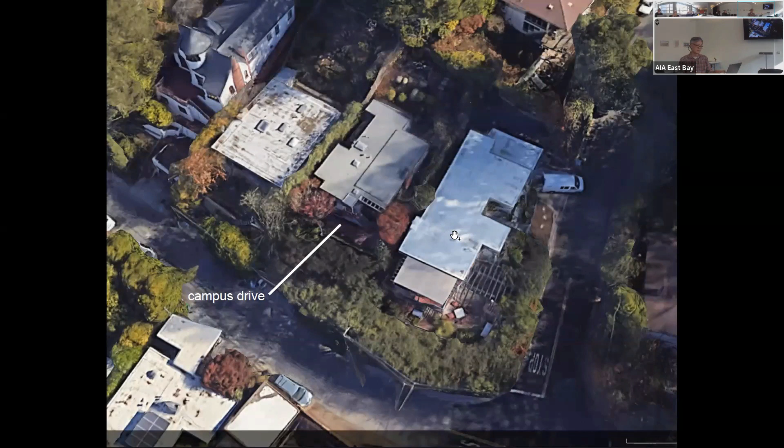When people contact me on my website, I usually suggest we have a phone call first as opposed to going out to their house, because a lot of times I want to avoid the situation where I drive somewhere and discover it's not something I'm interested in.

So these are my notes from these folks. They're a couple, kind of middle-aged. The wife is a scientist at Cal, the husband is a professional bassoonist, and they have an adopted grade school age daughter. They actually recently relocated to the Bay Area, coming from New York City, which I thought was interesting. I like New York City, so that piqued my interest.

By the end of this phone call, I wasn't so sure I was interested in the project. It seemed like sort of a glorified master bathroom project, and I was like, well, maybe not. But they talked about an addition, and I was having a hard time visualizing what they were talking about. So it was interesting enough for me to go out there and take a look.

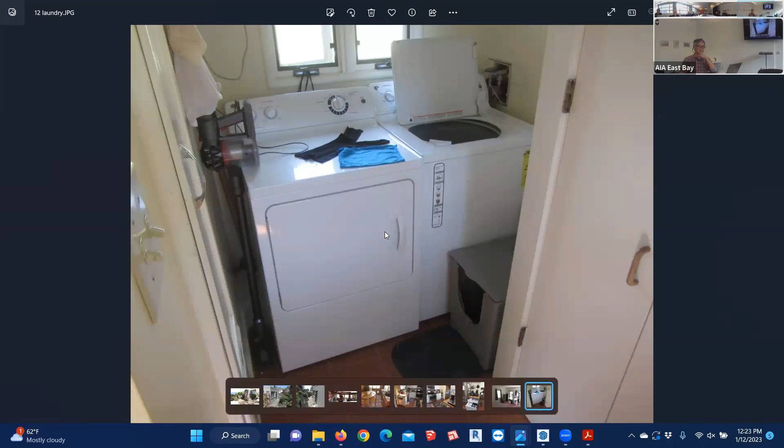Behind this door is a little addition that's literally about six feet by six feet, and it's their master closet - a walk-in closet. And a tiny little - well, it's not tiny, but it's a very awkwardly laid out laundry room. Then this is the pantry closet, right off the kitchen.

So those are my photographs of the house.

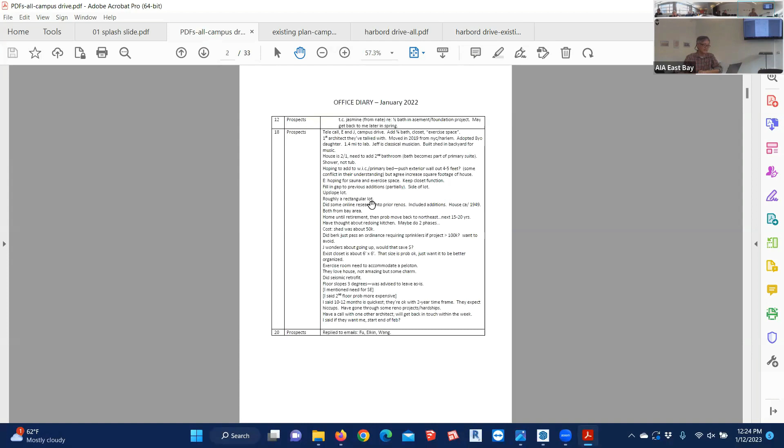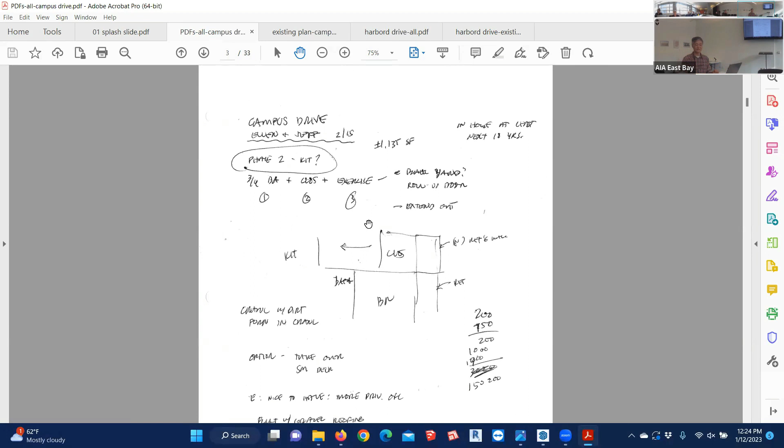These are my notes, actually - I forgot to mention, these are my notes from my site visit with them. On my first site visit, I walk around with a clipboard and talk further, and I try to jot down the things that they're telling me. A lot of times I can't decipher them later, or I forget what they mean, but I give it a try.

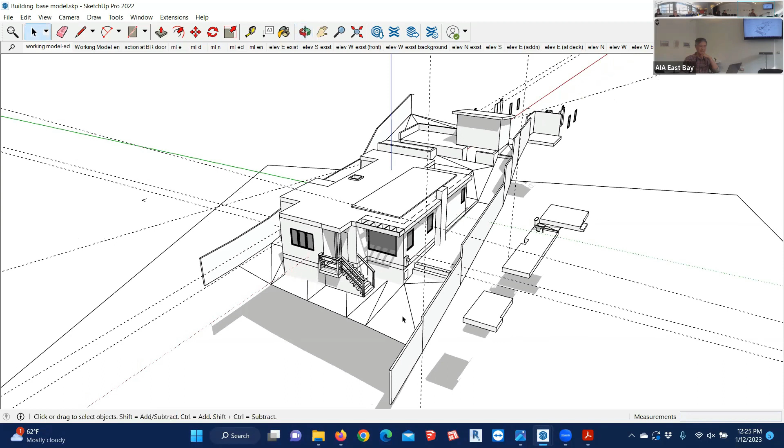I'm not so great at manipulating topography and volumes that represent the earth, so you can see this kind of reads as a bunch of faceted planes here, but if I make do, you can see that you can turn shadows on and off. Here's the husband's music studio - there's a deck that they built next to it. It's quite nice, there's a kind of raised planter bed here. And the stairs, which aren't shown in the model, are here up to that higher level.

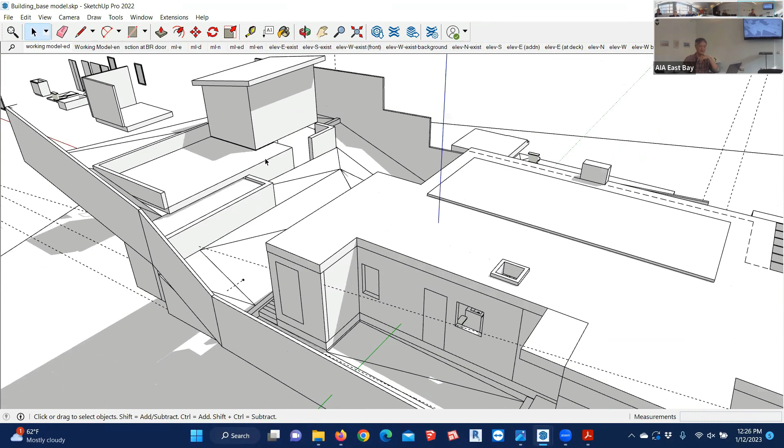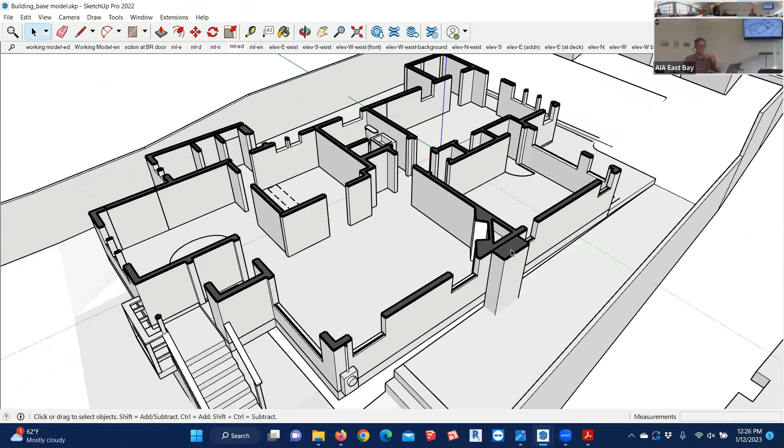So that's the model, and you can set up different views to show different things. Here's the existing floor plan - it's basically just the model cut at floor plan height, and you can tell the program to poché all the walls. Okay, so that's kind of where the starting point was, and now we just launch into the design.

Both. Let's see if I can.

Before I start showing design sketches - both projects, the clients are relatively good about thinking about what they want and responding to questions, which I often find not to be the case. So this is just a snapshot of an email thread I had mainly with the wife, and she included some images of things that she likes. We started thinking about the kitchen, and you can see she has some interesting tastes - it's kind of mid-century modern.

I don't dive into this level of design right away because I still want to figure out what the plan is going to be. But it's nice to have this in the back of my head as I start thinking about design.

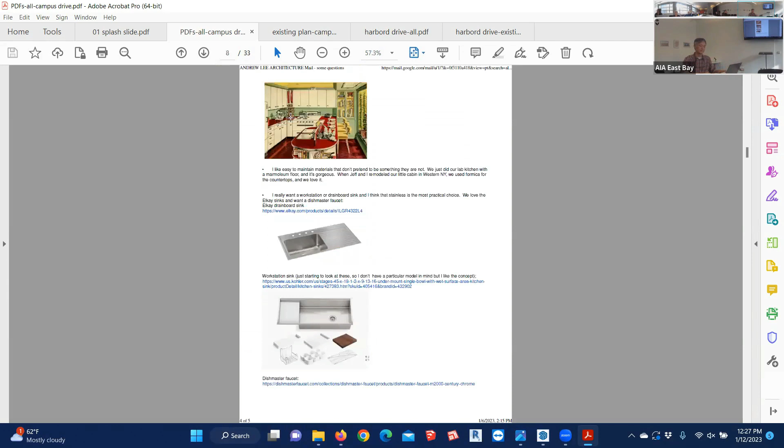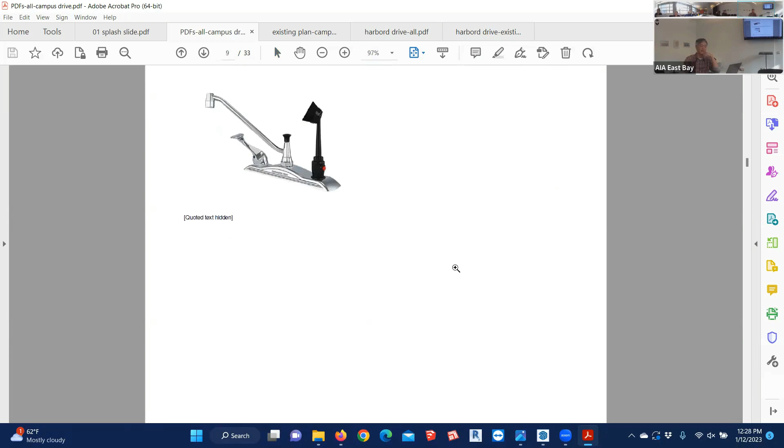Some beautiful images here, which, obviously I probably won't have the opportunity to do things like this, but it gives you a flavor of what they like. She even got to the point of picking out some plumbing fixtures that she likes, which is really nice. I really appreciate when clients do that. I'm not so sure I like that faucet, but in that case...

So both projects, this project and if I get to it, the other project, really lent themselves to attacking different parts of the program as little separate areas, and then they could be kind of mix and match. So what I'll show you first is the back of house interventions.

This first sketch is essentially what I think they had in mind when they came to me. And when clients do have an idea in mind, I usually say, okay, let me see if that works. So you can see this is their master bedroom. This is their little exercise room with the Peloton dashed in with a light line. This would require cutting into the slope, so I showed a little retaining wall and a path around it if they wanted to maintain a connection between the backyard and the side yard.

It takes advantage of an opening in the wall that's already here for a window and just turns it into a person door with a walk-in closet. And then what I think is a fairly typical bathroom layout, but I think it works well. The downside is that it isolates the existing bathroom, so we'd have to fill in this window, but so be it.

So that was the first scheme. I always show at least 2 or 3 schemes initially, because 9 times out of 10, there's at least a couple solutions to what people are asking for. So usually there's at least 3 different schemes, or 2 schemes and a variation.

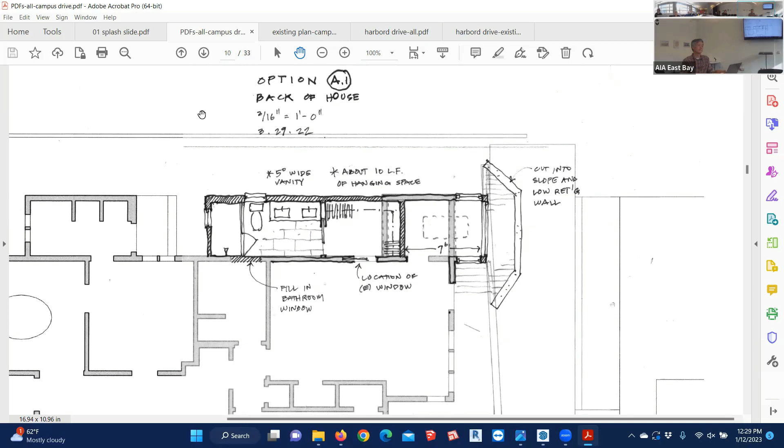So the variation on this is this diagram, which basically moves the opening into the addition over to here. And it attacks that problem I mentioned before, which is I think it's kind of a bummer to have the bed against this wall because it's right when you walk in the door. I feel like this is a better layout. You just punch an opening in this wall, you have a little vestibule here and a walk-in closet on this side.

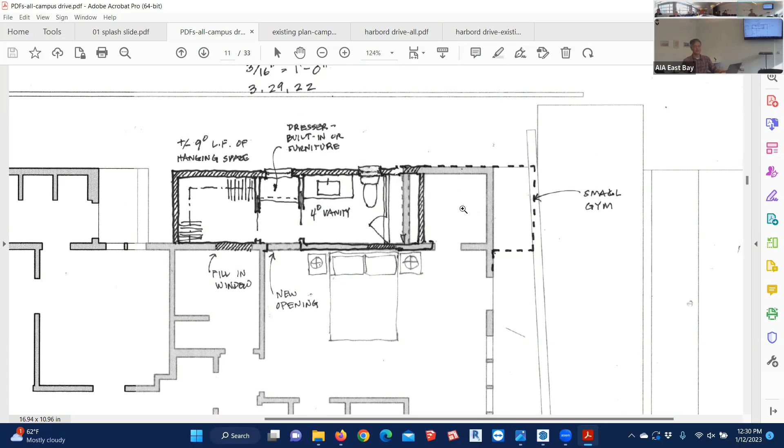Master bath on this side, same plan for the gym. Somewhere in the process, they emailed or called me and said, Andrew, we think we want the gym to be bigger. I said, okay, let's do that. So I drew this sketch, which basically shows the addition going farther into the hill.

I gave up on the idea of maintaining a path around it because by the time you get to this point, you're 6 or 7 feet above the level of the floor here, and I just felt like that's going to be an exorbitant concrete retaining wall.

I also had an idea of providing some kind of separation here if her office function remains in this little zone. So I thought, you could create a little pocket with some sliding doors that could be translucent to let light through, but it gives a little visual break between their sleeping area and her office.

I always try to do at least one scheme that is, I guess you could say, thinking out of the box, or just getting away from the assumption of what the solution is. So it occurred to me at some point that it would be relatively easy to repurpose this bathroom and make it basically the ensuite bathroom just by changing the entry sequence.

So this sketch shows the hallway moving to here and the entry into the master suite happening here, and then you're capturing the bathroom. Basically wouldn't have to do anything to the bathroom if you didn't want to, and then creating a standard 5-foot wide bathroom here for their daughter and for guests.

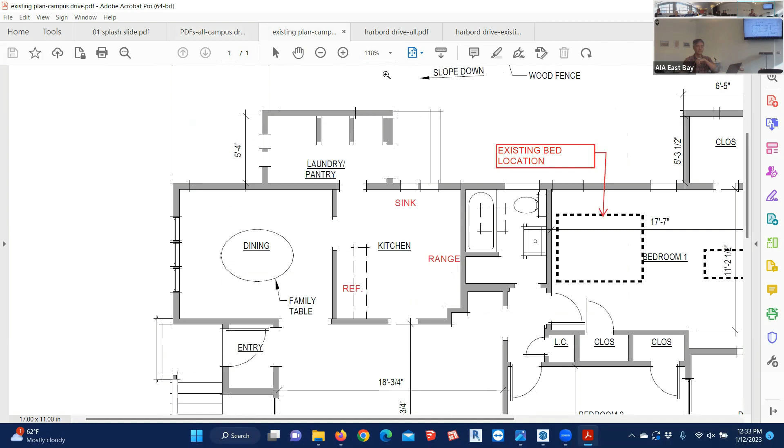A lot of times the first scheme I show will be the cheapest option. What can they do for the smallest amount of cost? In this case, I wanted to work with this footprint, and I thought I'd close off one of these openings to give them a more functional plan. So that closes off the opening to the living room, but it maintains maybe a little pass-through window, so you have a visual connection. Otherwise, it gives you a U-shaped plan, a functional U-shaped plan.

You can open up this wall opening from here to here, and it becomes an open, casual relationship between the kitchen and the dining room. But otherwise, the work triangle is essentially the same. You have sink, range, refrigerator. Same thing here, sink, range, refrigerator. And then I show some ideas for the pantry in the next sketches.

I rapidly thought, well, if we're going to be doing an addition here, why not just continue the addition into the kitchen? In my experience, if you add just a couple feet to a kitchen, it makes a big difference in terms of the feel of the room. Even a couple extra feet of countertop makes a big difference. So I bumped out this little hatched area.

Again, it keeps the same work triangle. I gave them back the opening into the living room, but it just gives them a little bit more space. This could be open from here to here for a nicer visual connection.

And then because it's such a casual house, I thought it wasn't a big deal to cut an opening in the dining room wall here and have this volume be two separate little rooms, one for the washer dryer and one for a little pantry area for the kitchen. And you still have the door out to the side yard.

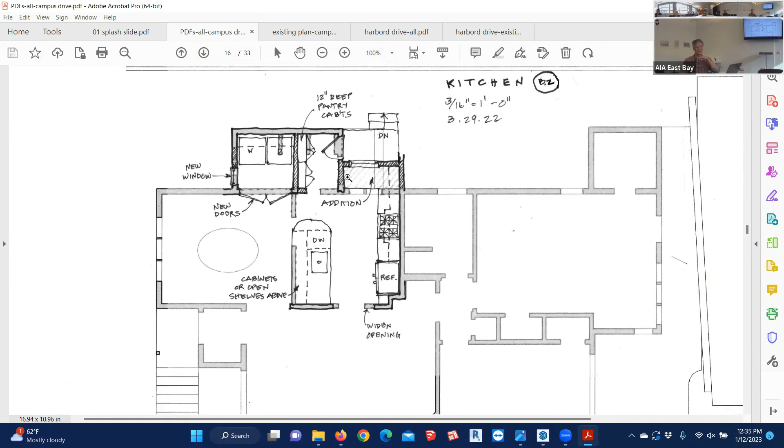This is another variation, and the big change here is that I just changed the work triangle. I moved the sink to the peninsula, and the range and the refrigerator are here. This can just become an extra counter space with a view out—maybe a place for morning coffee or something like that.

Somewhat of a different configuration for the laundry rooms, but same idea.

And then I did one out-of-the-box idea, which is flipping the kitchen and the dining room. It's fairly easy to do. After I drew this, I realized I'm not sure really what this gets you. I think it's really just reversing the two spaces.

You do have an opportunity for maybe a little bit of a nice inside-outside feel here, with a pair of French doors from the dining room. But otherwise, I don't know if this really added that much. And I found a lot of times when you propose moving a kitchen, it's almost too much for people to process, and they would kind of reject it without even really being able to think about it.

I always like to include a little table like this whenever I do a kitchen, and this is a comparison of the functionality of the existing condition—base cabinets, counter space, upper cabinets—and the different schemes I'm presenting. So they can have a sense of what they're gaining functionally from these different schemes. Am I getting a lot more counter space? Am I getting a lot more wall cabinets, et cetera?

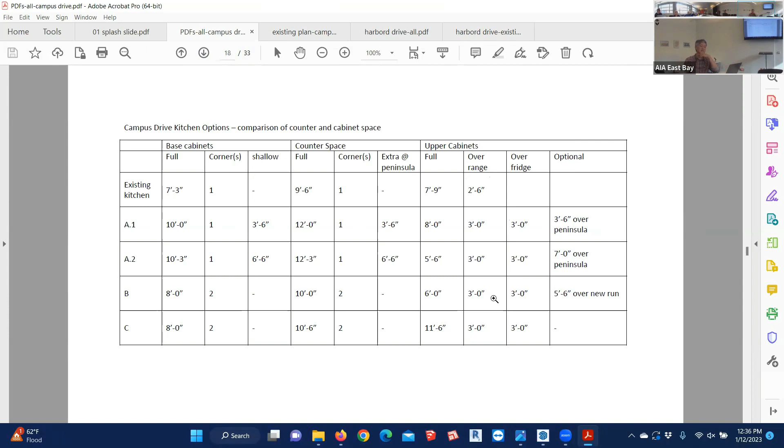And then I had a couple more out-of-the-box ideas for her office. I realized that you could actually do a little addition here. There's not a whole lot to be lost by blocking this wall—this is where the washer dryer is currently. There are little windows, but it's not important.

This gets her office away from her bedroom. She no longer has a backyard view, but now she has a view of the bay.

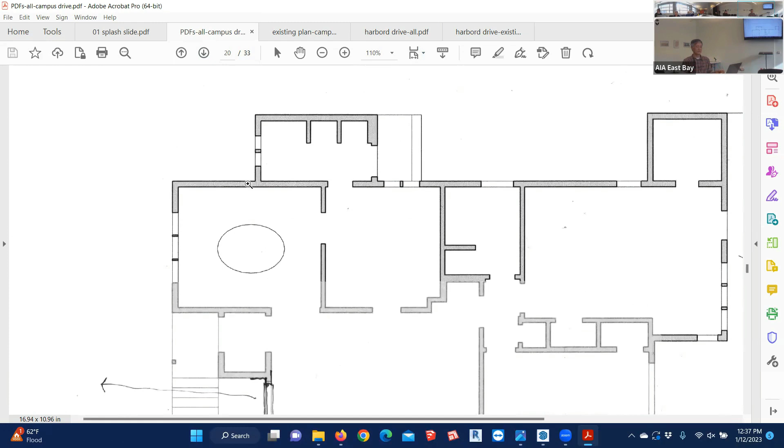This is facing west. She can put her standing height desk there. Technically, this is not a legal room, but in my experience, if the opening is wide enough between this space and the dining room, the plan checkers won't give me a hard time about it.

And then the other out of the box idea I had was doing a little addition off the living room. This preserves most of their view from the living room through this big picture window. This could be her office, or it's big enough to be an exercise room. It's actually a legal room, I think.

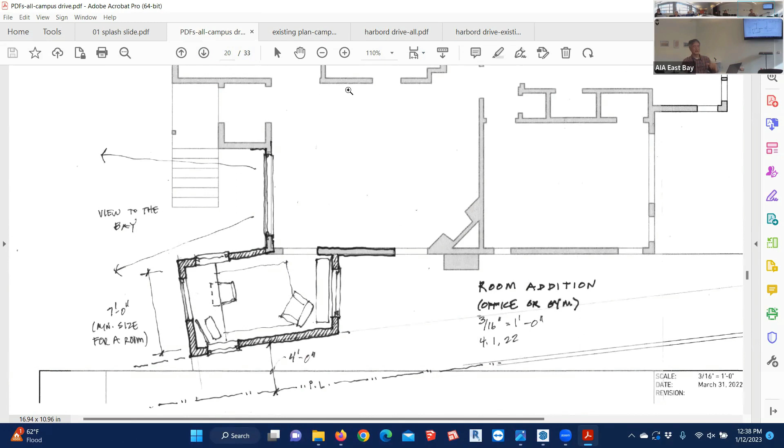So those are a couple ideas that I threw at them, and I think they appreciated seeing those ideas.

Okay, where are we? So those were essentially my first pass at schematic design.

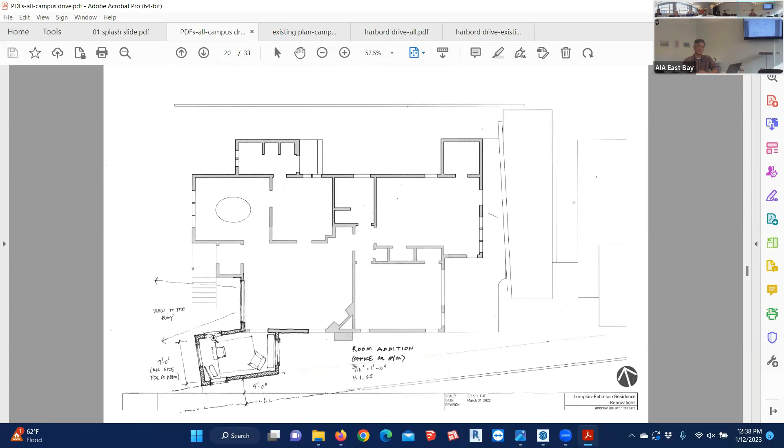We went through some conversation. I think they liked a lot of things that I showed them. They pretty much rejected the idea of the hall bath that took over part of their daughter's room. They didn't like this image here. Well, I don't think it's that they didn't like it, I think this is just too big of a change for them - this kind of little angled room here.

So let me keep going. This is, let's see... yeah, this is essentially the final scheme.

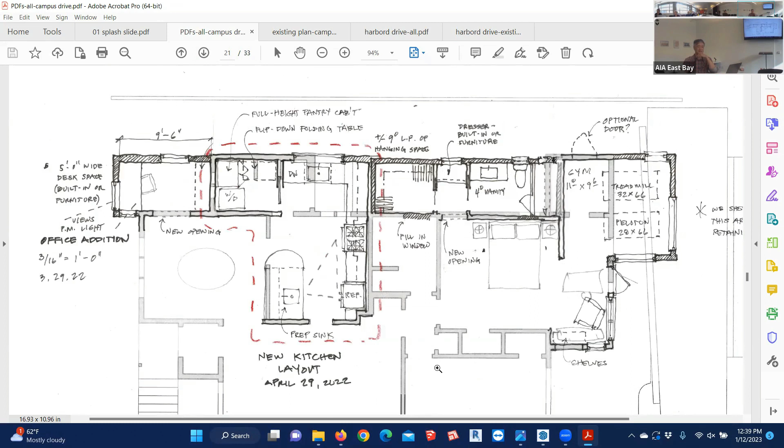They actually asked me if we could just bump out the kitchen all the way to align with the rest of the house. Maybe somebody who's listening or watching can tell me - I know in Oakland there's a rule that you can't have a continuous plane along the sidewall of the house. I just don't know if that's the case in Berkeley.

If it is, I think we can do a little inset here to give a little bit of planar relief, if you want to call it. That makes such a huge difference. Yeah, well, you gotta satisfy the planners.

They like the big gym. They like this idea of moving the opening in their master bedroom. This is the final scheme for the kitchen. She liked the office. The only thing that's a little bit up in the air is this - still kind of TBD. We've been doing some back and forth with this area here, the washer dryer and pantry.

Let me go back to the model really quick and show you the final design.

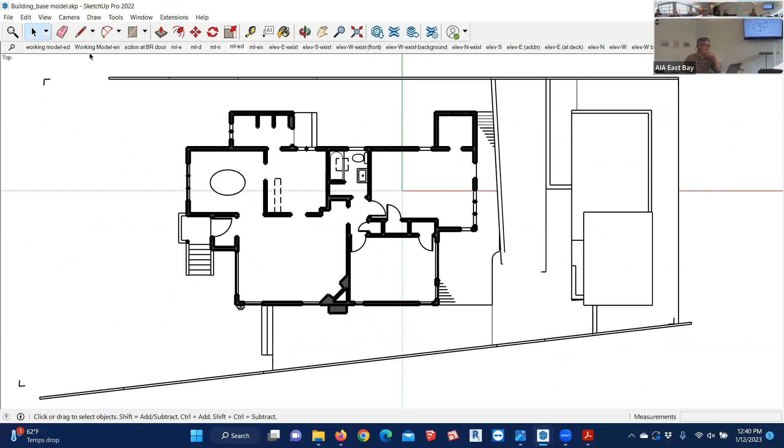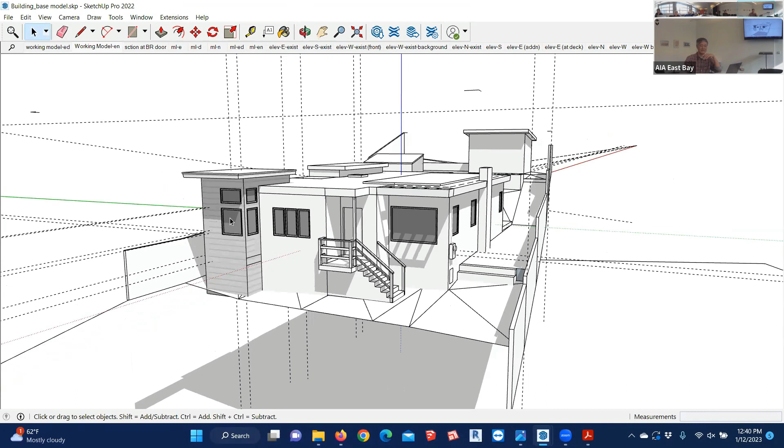One thing I wanted to say about this that I've been pleasantly surprised by is that there's something about the scale of the proposal that I feel really comfortable with. It's relatively small, the additions are relatively small, and I feel like it's appropriate to the house. Obviously it's not a traditional house, not a pitched roof house, not a bungalow, and I feel like the language of what I've tried to work out here fits with the house fairly well. I'm just looking forward to seeing if it feels nice when it's built.

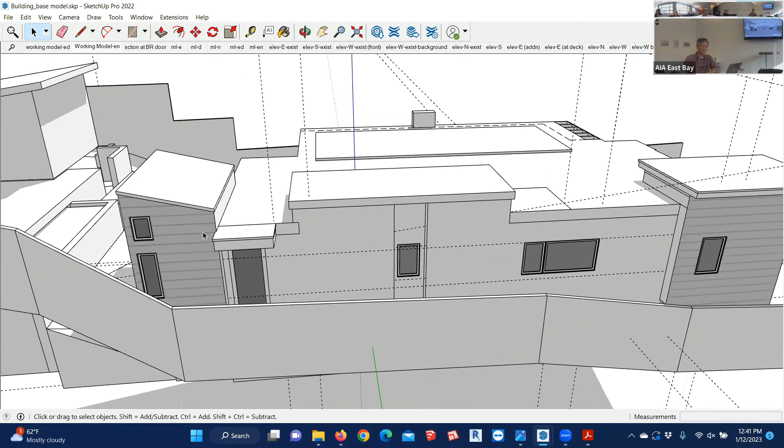So here's her little office addition. This whole space has been filled in here. And then this is the little gym addition. We're actually leaving the entire roof here, so part of the ceiling of the gym addition will be vaulted ceiling, but part of it will be a level ceiling at the existing ceiling level.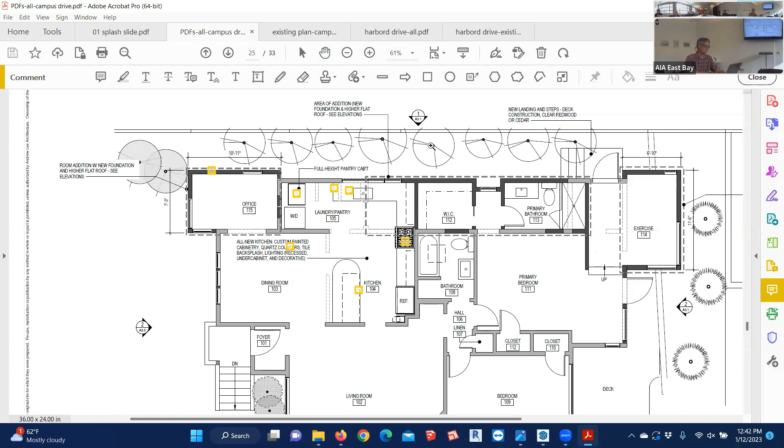And then elevations.

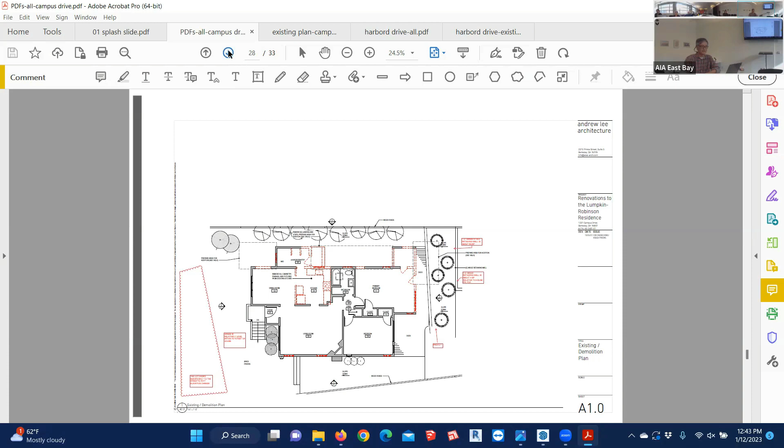And then I had another set. This is the set that I'm using for dialogue with the structural engineer. I sent him the set and I had some things that I wanted to point out to him, and he has just now developed his first pass of structural design for the project.

Ooh, and that's where that project is. Maybe I'll take a little pause because my mouth is dry.

Any questions so far? Just one on this, I guess it's the north pop up there in the addition. Yeah, you're gonna look to get any skylights in there?

Skylights, here or here in the back? In the elevated portion, the middle. Oh, in the middle portion. You know, I didn't think about that. That's not a bad idea though. I will now think about that.

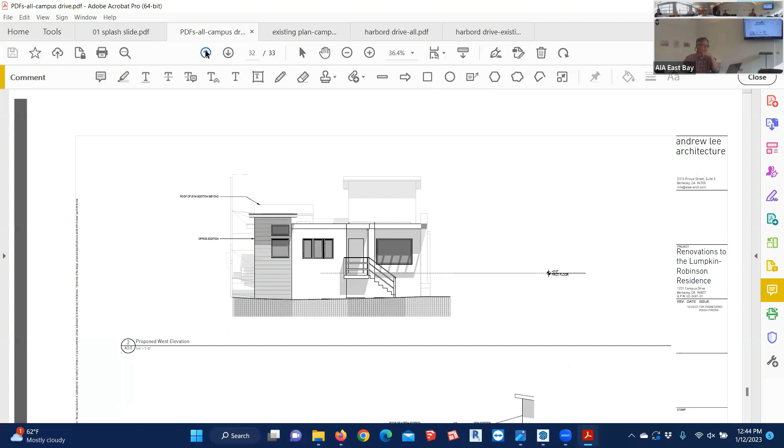This side is closet, so I don't know if it's worth it, but this side is bathroom. So that might be an interesting idea. I would have to look at that section and see, does the roof need to be a little higher? With that bathroom, one thing I find that adds a lot is natural light, and you lost the wall there. But you can put a big ventilating skylight in a place like that, and you can solve the ventilation problem and the lighting problem with one move. Yeah, it's a good idea.

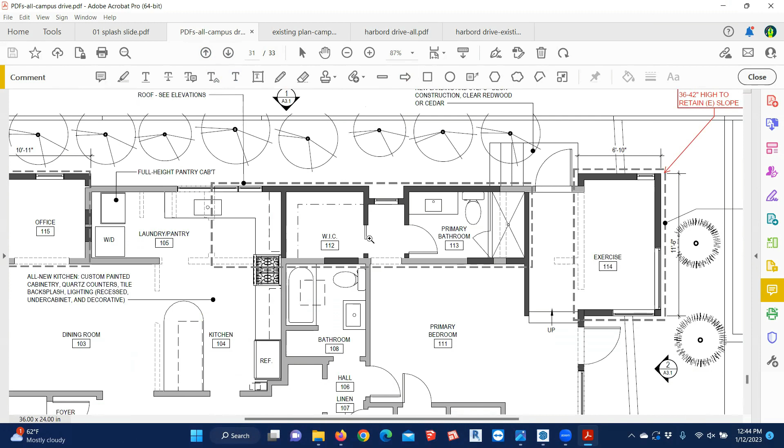Are there any questions on Zoom? Yeah, what happens with the existing bathroom? Is that getting a skylight or something? It already has a skylight, Kristen. Oh, okay, yeah, that's existing.

So I have a real nuts and bolts sort of question. How do you structure your fee proposals so that you can do all these different schemes and feel comfortable? That's a great question, Claudia. I pretty much know at this point in my practice how long it takes for me to come up with the initial round of schematic design, and I'll provide an estimate. All my contracts are hourly, but I provide an estimate where I can, and the first round of schematic design is usually anywhere between 15 and 20 hours.

And then I sit down with them, ideally in person, but more often by Zoom. Revisions are really just kind of running, I'll say something like, at the minimum usually it's like 5 hours, but it's as much as you want, essentially, and people seem to be okay with that. And then when you get to the construction documents, you set like an upset maximum or some sort of budget goal? I don't think I've ever set a not-to-exceed number. I usually tell people it's somewhat related to construction cost. It's all estimates.

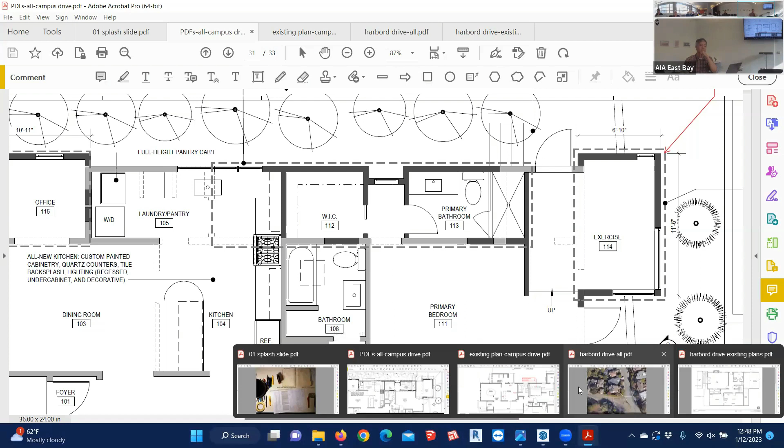Yeah, yeah, I do something weird though. I do all the structural drawings. And so, yeah, I need them to really be on board with me. I do that because I combine the architectural and structural information, so I don't get one guy out here doing one thing and me over here doing one thing, and the guy in the field saying, yeah, right.

How am I doing in time? We're doing fine, it's 10 to 1.

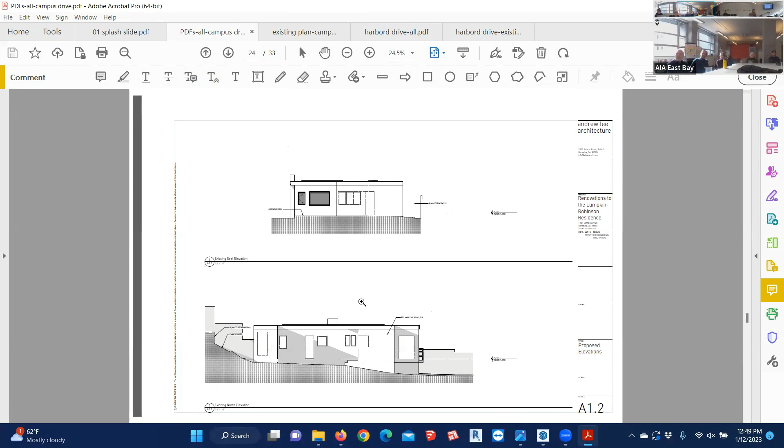I just have one question, Andrew, on how you present your work to your clients. On one scheme where you showed the addition off to the lower left, the views in the office were kind of different from all the others. It wasn't like an orthogonal addition. Is that something you typically present with some 3D or elevation drawings to help them understand that?

I do. I do it where I think three-dimensionally it's interesting or important for them to see a 3D model. Unfortunately I think I archived it, but I did show them some three-dimensional views of this scheme to help them visualize it. Actually I'll show some 3D views of the second project.

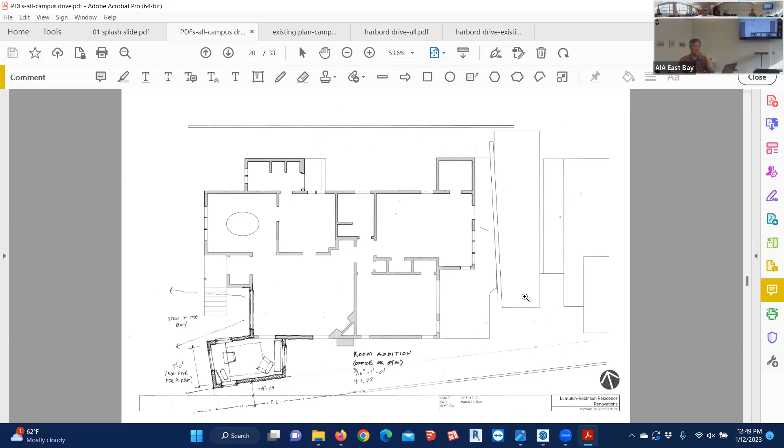Let's see if I can. Again, started with a conversation. These folks came to me through the website. Interestingly, we started with a Zoom call, not a phone call, so I was looking at these folks when we were talking for the first time, which was fine.

I added a couple notes here - this is sort of like the human element. They have 2 kids that are basically in the process of leaving home, and they said they're in the house for possibly another 5 or 10 years. My thought was, that's not a lot of time to want to undertake this big project, but they do.

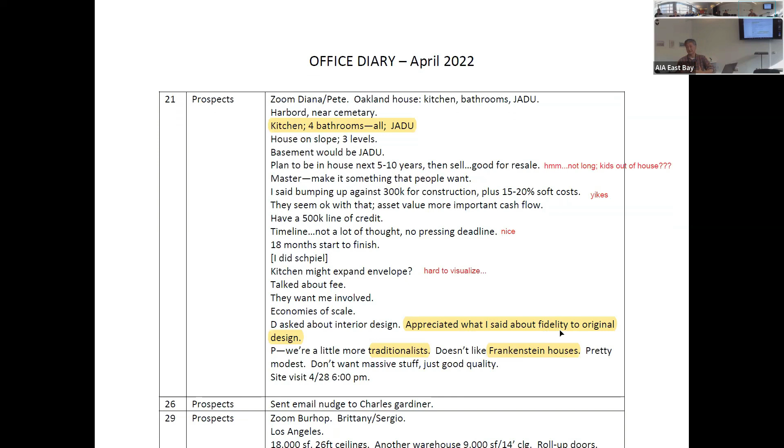The other thing I noted here is that I think I'm in trouble with this project because I may have set their expectations too low as far as the construction cost, which I still haven't figured out a way to avoid getting into trouble with sometimes. They appreciated some things I said in my kind of elevator speech about my approach as a designer, which was nice.

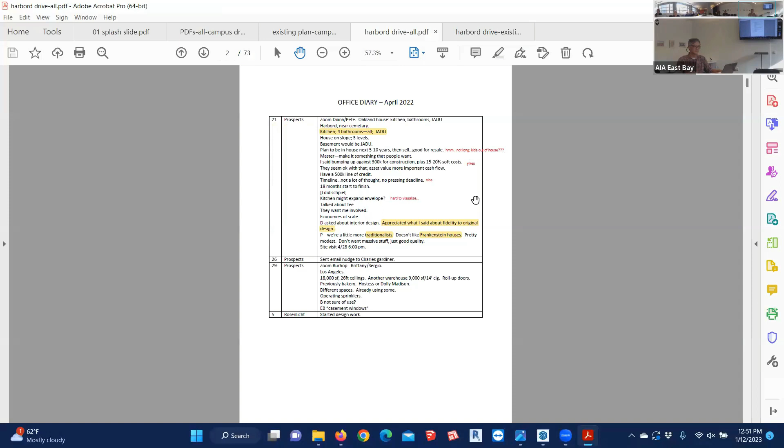But yeah, so let me go to the photographs. Let's see. So this started back in April, I believe. Before I start talking about more of the house, we had a meeting - a follow-up meeting in their dining room after the Zoom meeting, just to have a second conversation. I think I brought my laptop and showed them some more things.

And the wife in particular is one of those people who, there's something about her facial expression where you're talking with her and thinking she is not buying a single thing I'm saying. You kind of progressively get more nervous and feel more like a fraud. By the time I walked out of there, I was like, there's no way in hell I'm getting that project. Oh well, easy come, easy go.

Sure enough, like 2 days later, they emailed me and said, we liked your presentation, and we decided, why wait? We'd like to hire you. And I'm like, wow, okay. Since then, I've just realized she's one of these people who has this facial expression where she's kind of slow to jump on board with things, and she's thinking about what you're saying very, very critically. She's not like all excited and blah, blah, blah.

But she's actually a very nice person. It was just interesting, the kind of human element of what we do - it's like constantly, just when I feel like I've seen so many different houses, so many different families, then you have another experience and you're like, oh my God.

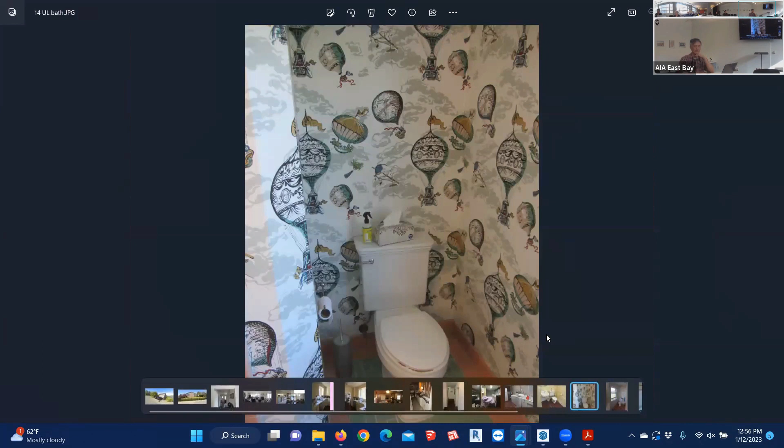Jumping upstairs to the second floor, this is the hall bathroom, the kids' bathroom, and then a couple shots of the master bath, which is kind of vintage, and then the master bedroom beyond through that doorway. This is an exterior shot.

Here's that retaining wall I mentioned. Here, surprisingly, this is a cantilevered volume, and this is part of the breakfast room that you saw—the kitchen is behind this wall. And this is the other back corner of the house, looking up towards the driveway and the street. This is the back corner of the house here.

I didn't talk about the program. The program for this project is quite large. It's renovating the kitchen, full renovation of the kitchen, and they talked about expanding it because it's quite small. And renovating every bathroom in the house—there's 4 bathrooms: one on the ground floor basement level, one on the main floor, and two upstairs. The idea with the ground floor basement is that they want to turn it into a JADU. So it's quite a big scope of work, which is nice—lots of stuff to work on.

Let's see, so going back to here is... let's see, I'm actually trying to use more online tools.

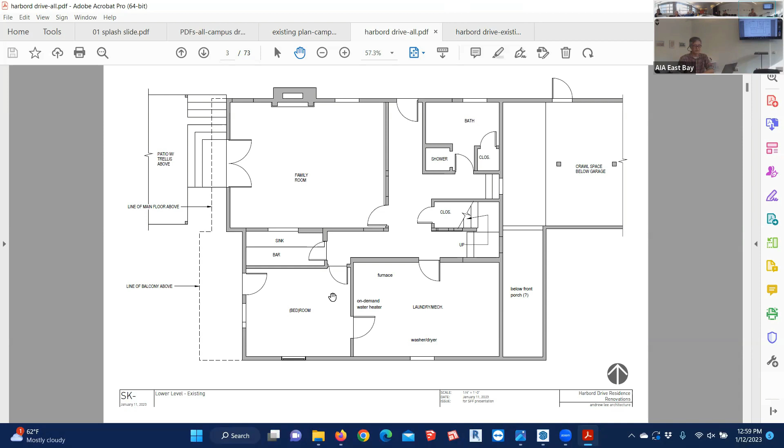Okay, so these are the existing plans. Again, this is the result of me doing site measurements and then building the model in SketchUp. This is the lower level—this is that big wood paneled room. Here's the laundry room, crawl space below the garage, little bathroom, side entrance from the side of the yard. It's technically a bedroom, but it's just filled with junk right now. And here's the bar.

Main floor, garage here. Here's the front door, entry hall, breakfast room with that little cantilevered condition here. Kitchen, dining room, the nice big living room.

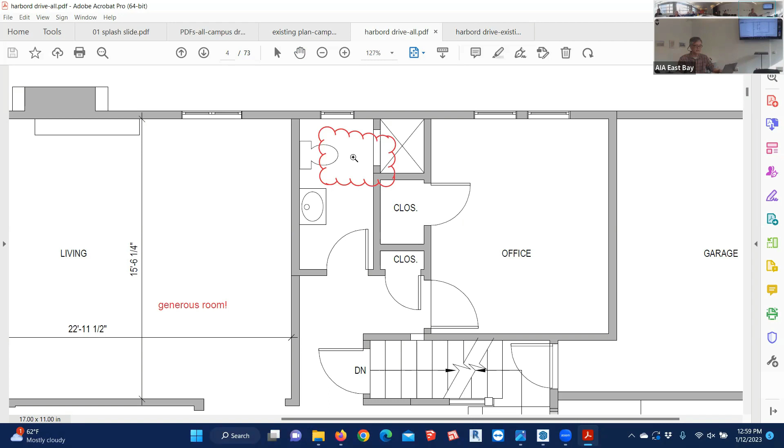Here's the hall bathroom that they wanted all that crazy wallpaper in. I circled a couple of things that jumped out at me. This is obviously not a good condition here dimensionally, it's a very tight room. And then here in the kitchen, this little bump out is a real bummer because you have to have some kind of little jog with whatever's going on in the kitchen, which they do. This is a very shallow hall closet and their ovens are here. It's just like, oh, that's a bummer.

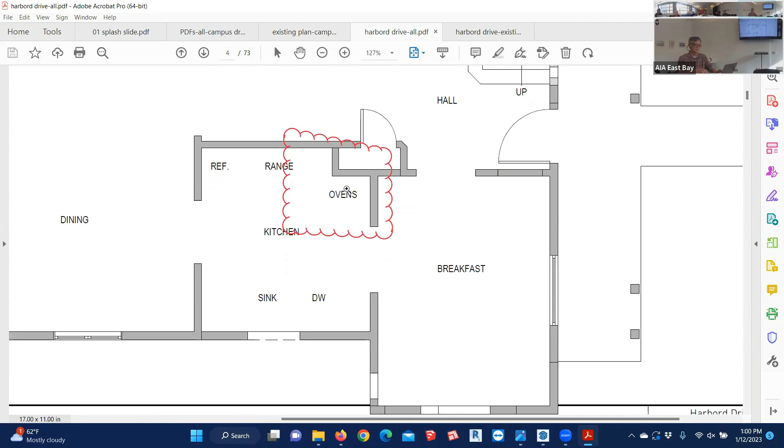And then second floor, the only thing we're addressing is here at this corner. Here's the stair from the main floor, hallway, and back-to-back bathrooms. Here's the hall bathroom, here's the master bath.

The hall bathroom interestingly has a separate shower and tub, which to me is kind of strange. And their kids are leaving the house, so why wouldn't you want to just combine these two functions? But for whatever reason, they want to keep it, so I was like, okay. And you can see this master bath, it's not great, there's kind of a lot of open plan space here, which is kind of wasted. So those are some of the things I think about as I start looking at the plan.

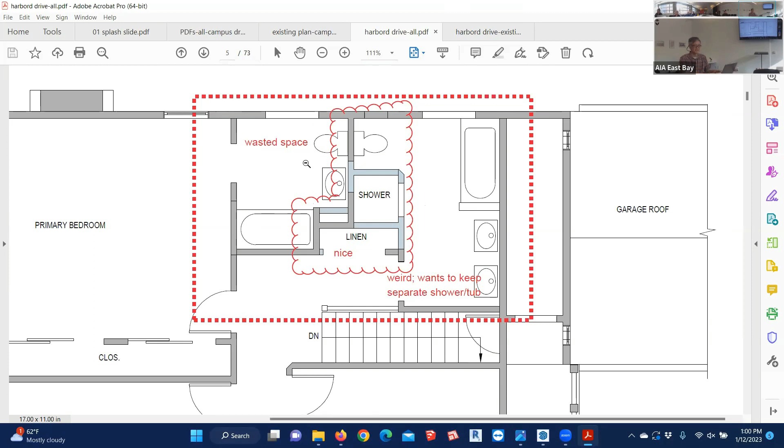So let's see, I guess, yeah. Again, I'm trying to be better about not diving into design right away.

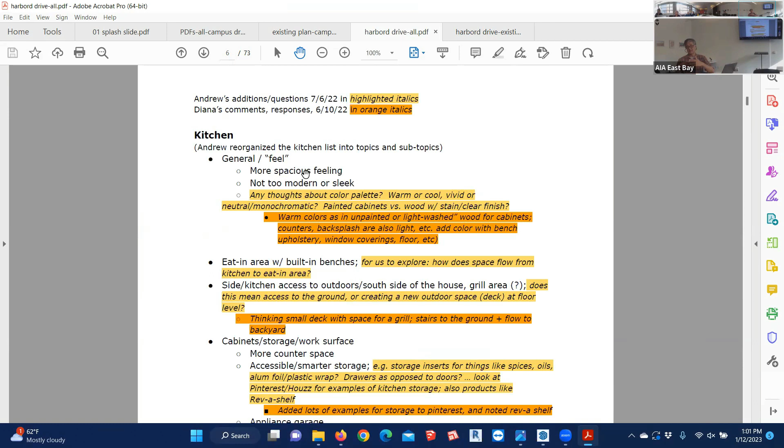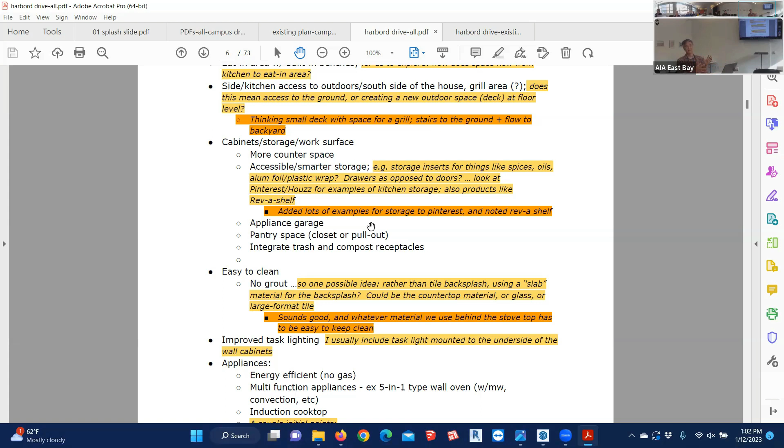I have an impulse of wanting to start sketching right away once I get the plans into my computer. I feel like I don't spend enough time really understanding what the clients want, trying to draw stuff out of them. So I have this dialogue, which is actually a Google Doc, and I just printed it out with some dialogue that I had with the owners. Diana, the wife's name is, put together like a brain dump document of all the things they're thinking about. I reorganized it into a bullet point list, and then we had a little dialogue with some questions back and forth, which I think is good. And then you get into design, and you kind of leave all that behind because you're thinking about all this technical stuff of construction and codes, getting a planning approval and all this stuff, and you forget about all that design stuff. I'm trying to figure out if there's a better process for that.

So again, like the first project, this kind of lends itself to attacking the scope of work in parts, and it's very much mix and match. I'm going to go through these a little bit faster just because I'm getting tired.

Kitchen scheme, the first scheme - usually my clients have an idea of what they want, and unless it's absolutely ridiculous, I'm going to see if I can make it work. So this is essentially what they had in mind. I smoothed out this little jog here and basically said, hey, this is a galley kitchen. I'll give you some space on this side of this wall for built-in seating or storage in the hallway. There's space here for an appliance garage behind the counter, and then a breakfast nook, standard work triangle, pantry.

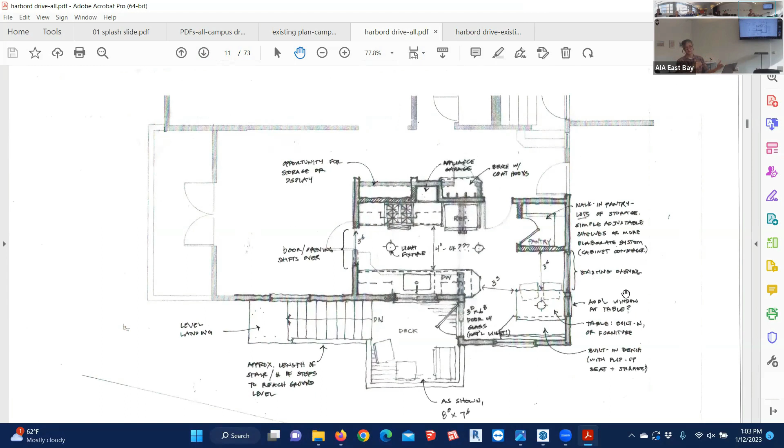More and more often I do a clean sketch like this, which is just trace paper laid over a CAD plot. They'll do a second drawing that has explanatory notes on it, so they can look at both images - the clean image without all the distraction of text, notes, and dimensions, and then go back to this image and see some of the things I'm explaining, like here's an option, or here's something to think about, or is this dimension going to be comfortable for you, that kind of thing.

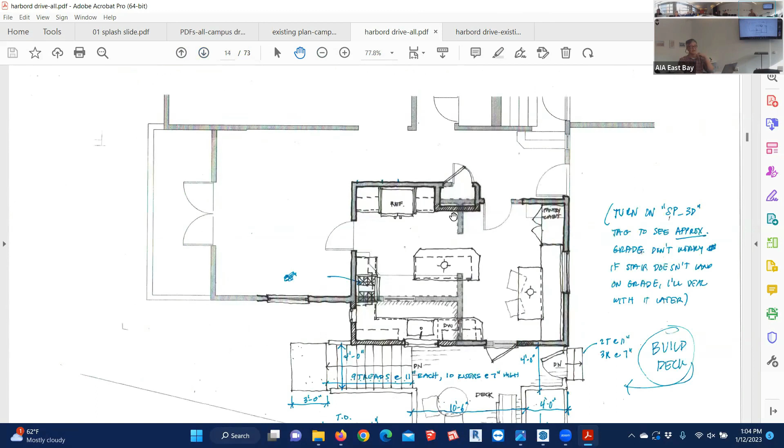Notes to the scheme. And then finally, they asked for a scheme that showed a little addition. This is essentially what they had in mind, and it works fine.

So that gives you room for an island. The sink essentially stays where it is, and it just moves from here to here. You have space for a nice breakfast area with a built-in bench, pantry cabinet, and refrigerator here.

Last summer, I had a college student working for me briefly, a very nice young man who goes to school at San Luis Obispo. These notes were directions to him to develop this model, which he did reasonably well.

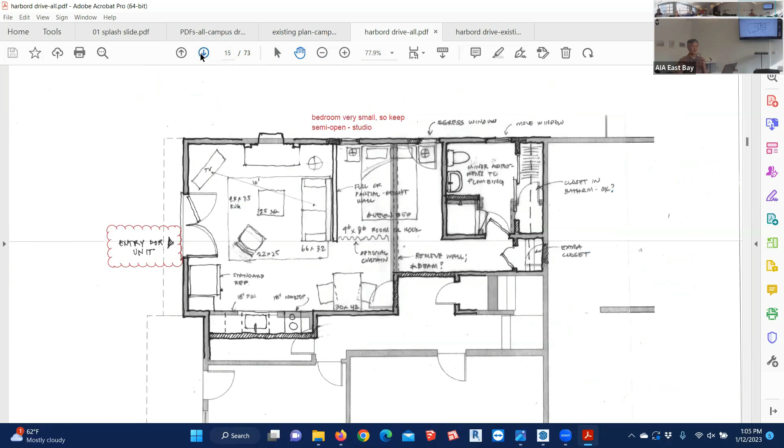Schemes for the lower level. This is my first scheme to create an ADU out of that ground floor plan. So you can see here's the existing wall of that family room, which we showed demolished.

What I thought could either be a full or a partial height wall to separate the sleeping area from the living area. The bar becomes the kitchen, and the bathroom stays where it is, so you save money on moving plumbing. I thought this would be kind of an open space, because if you close this off, it's quite a small

bedroom. So I thought, oh, maybe there's a curtain here. It's basically a studio.

The second scheme shows essentially a full bedroom, although again it's quite small, moving the bathroom from here to here, keeping the existing entry door and having like a little hallway here, and then a kind of open plan living area.

In both of these schemes, the entry would remain.

I think I was kind of holding this as an item to be discussed, these French doors, which are existing. And that became a little bit of a revision later on.

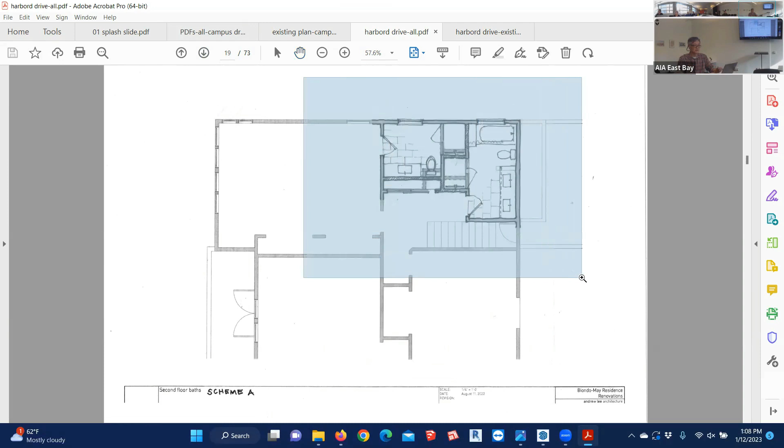Second floor bathroom schemes. Here's the first scheme, again keeping both functions in the hall bath, both a tub and a shower, rearranging the

plumbing in the master bath, moving the linen closet from here to here. So you're basically grabbing this little space here for the hall bath. Explanatory notes.

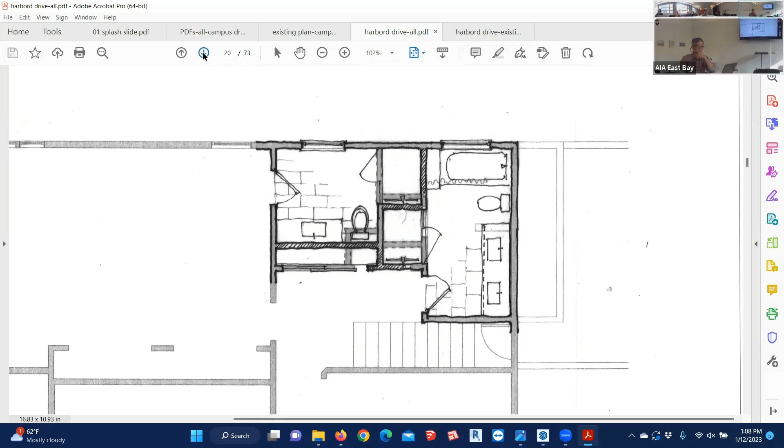Second scheme. The linen closet gets a lot smaller. The bathing function of the master bath basically stays the same. I move the toilet in the hall bath from here to here, so this becomes much more of a standard arrangement, and the shower gets moved down, and then they get a little kind of semi-private space for the loo.

Some notes, and then a third scheme, which I thought was kind of interesting. I kind of like this. I'm not sure what it really gets you functionally, but I thought, oh, this is kind of an interesting plan.

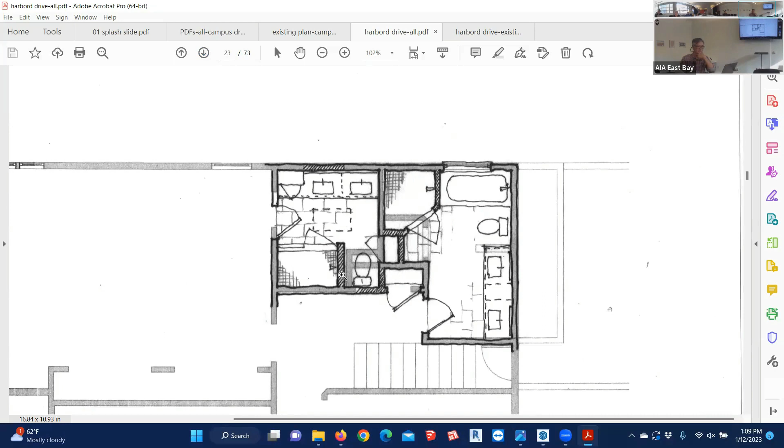Notes. I always include a little narrative along with schematic design that may explain some things that didn't get into the drawings.

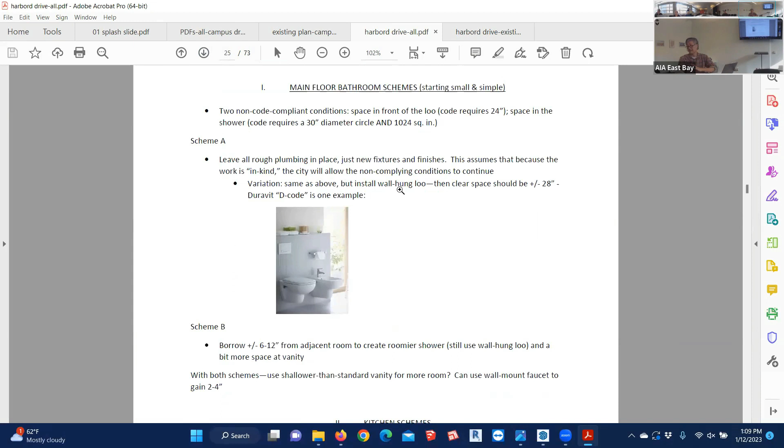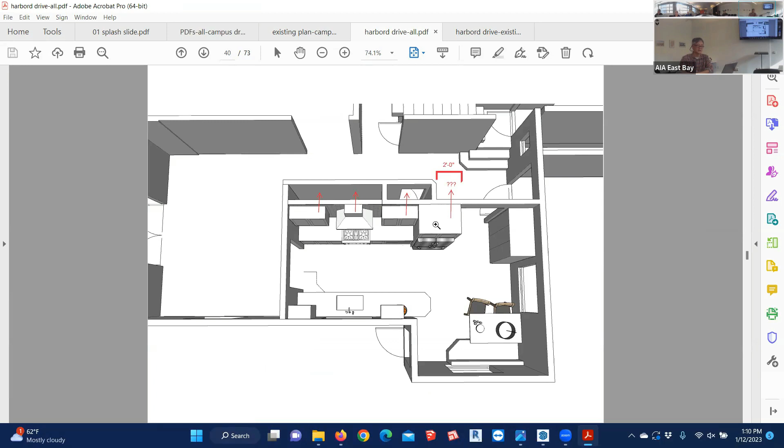Some revision work in response to questions they had, some design developments. The drawings becoming more concrete. More dialogue in response to questions, more iterations.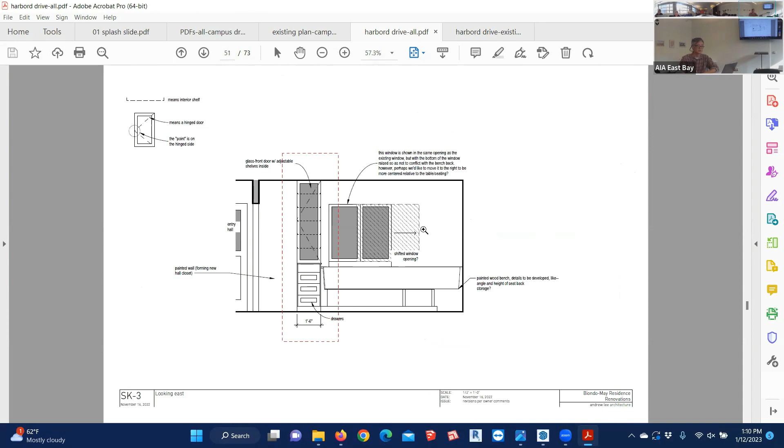Kind of zooming through this now. Changes to the ADU plan. They asked for some other little design touches in the house.

They asked for like a built-in bench in the master bedroom. So I did a little rendering for that.

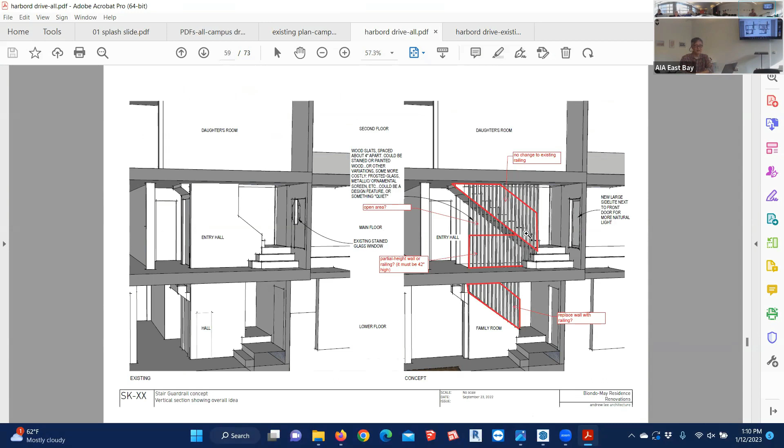They asked for opening up the stair to let more light through. So I actually did one of those things that you see in projects that are published, like an open stair kind of concept, which they didn't go for.

And then this is where the drawings stand now. This is essentially a set that's ready for planning submittal.

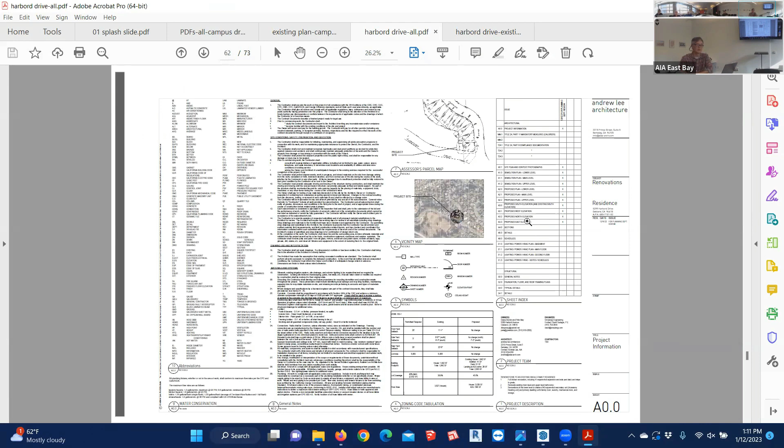I think these drawings look pretty nice. People are partisan about their CAD platforms, whether it's AutoCAD or Revit or Vectorworks or whatever. But I think with these drawings, there's a lot of kind of workarounds to get this to look like this. But in the end, I think it looks okay.

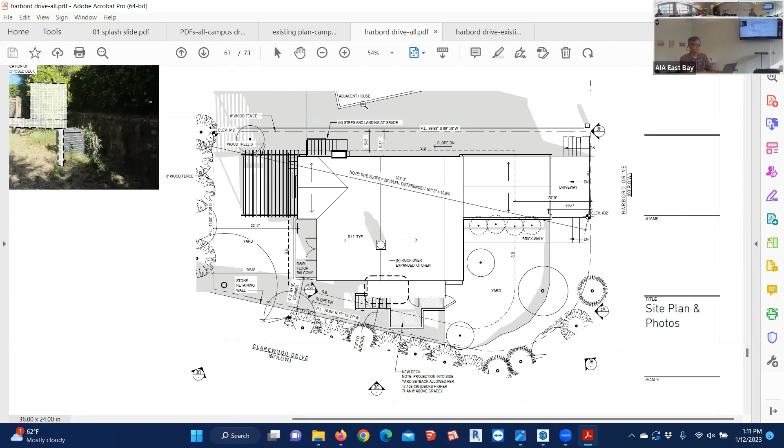Demolition plans, construction plans, and elevations, existing and demo. I think the planning department will be okay seeing it just like this.

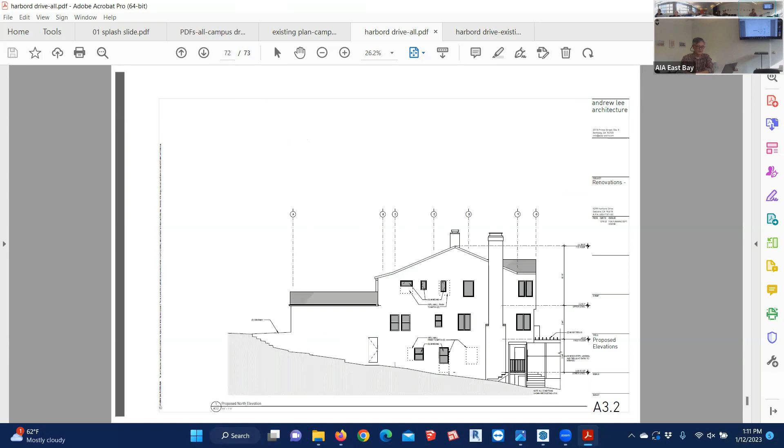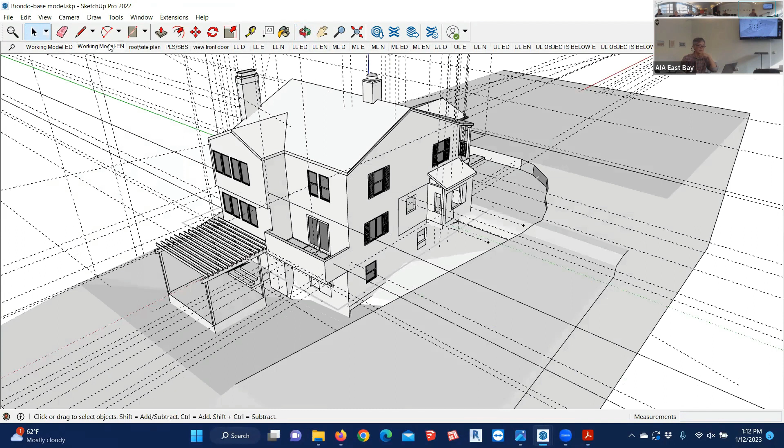I'll show you the model really quickly. Here's the model for this house, developed to the same level as the first project. You can see here's the retaining condition, rendered very crudely. There's not really that much happening with this project from the exterior, but that's the existing conditions, and that's the new condition with the kitchen addition.

I think that's all I'll show for the visuals. Maybe I'll just stop there. I'm tired of talking. Maybe there are questions that people have.

Happy to take questions, happy to have discussion. Any hands up? No, all the chat is just positive comments, feedback.

A couple of things you said struck me as interesting about how you presented yourself at the very beginning to the client. One, you said that 50% of your work is coming from people looking at your website. I'm wondering, is that typical these days or is that unusual?

It's not typical for me, but I haven't done that optimization where my name comes up at the top of the list or any of that stuff. I have a real basic website. They tend to look at it after they've met me.

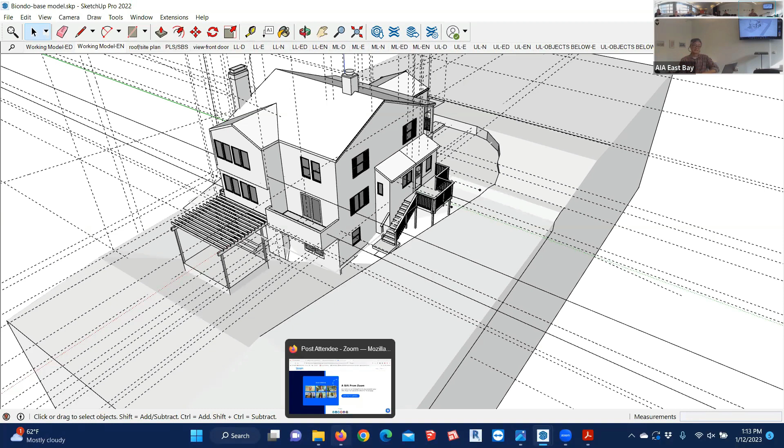Anybody else want to share their thoughts on it? Can you show us your website? Happy to. How do they find your website? That's a good question, I'm not sure.

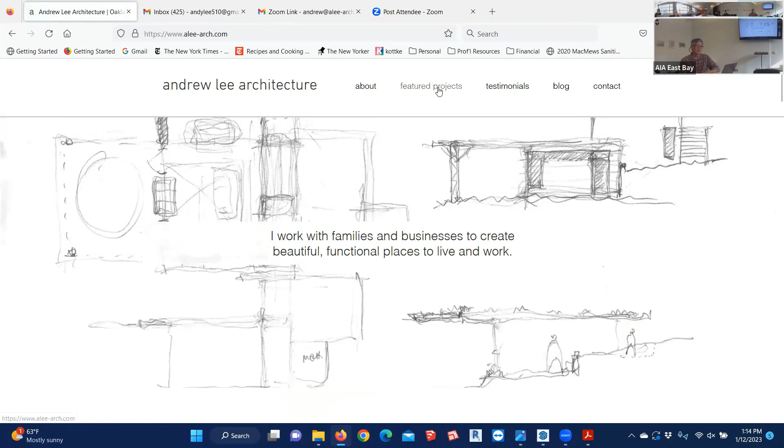I think the other thing that struck me about how you present yourself initially was that on some of your clients, your first meeting is by Zoom. Yes, and I've done that a bit now too. There weren't many good things that came out of COVID, but I would put that one in the good thing that came out of COVID category. It works pretty good.

It's very time efficient. Your ability to call up your drawings and share them, and get their feedback and all that kind of stuff. Yeah, I agree.

I think in a perfect world, I would still be meeting in person more often, because the longer I do this, the one thing I'm appreciating more and more is being able to have trace paper and a pencil in front of me while we're talking. People really enjoy that process and enjoy seeing things happening in front of them, and it's more time efficient than going back and forth.

You can do things while talking on Zoom, but actually drawing on Zoom, unless you've got a camera focused on your desk or you're more tech savvy than me, making edits on the fly is hard. I still think it's great to be sitting at someone's dining table with trace paper and pens and pencils. They say, well, can we do this? And you throw a piece of trace over your drawing and start sketching.

I'm facile enough with that, I think people get positive feedback about that process when I get a chance to do it. I also got the impression that you recognize the importance, in the initial contacts, of efficiently deciding whether or not this is a project you should be working on, or these are people you should be working with. Yeah.

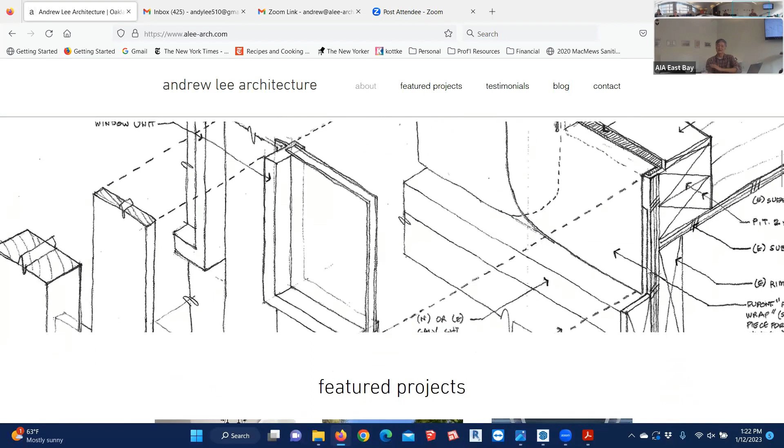The landing page had some sketches I saw at the top. Is that typically how you come in? Yeah, just the transitions between sections of the website. I thought I needed some kind of interstitial images, and sometimes in the past I've done these nice three-dimensional drawings because I'm trying to either understand something for myself or convey it to a contractor. I just scan some images, and I do some hand sketching in my free time.

So your sketches and watercolors are beautiful. Oh, thank you very much.

And then you have different size projects as well, so people can see that it doesn't overwhelm them, but they just want, like you said, a small addition or remodel? Right, yeah, and that's been my practice. I've done some very small projects, and then I actually did one — this is the one ground-up building I've done, a little commercial building in Walnut Creek.

I noticed there's a question from Sandia asking whether I work with clients who ask me to help them with finishes, and I often do. That's one part of my practice and my skills as a designer that I feel is kind of my growing edge. I haven't really worked out a good process or workflow for helping people make all those myriad decisions on countertops, tile, cabinetry, windows, and all these different things. It really varies from project to project, depending on what the particular client or family wants and their style.

Are they more of an adventurous DIY spirit? In that case, that's fine, go crazy, I'll be happy to give you feedback. If there's a code requirement, like fixture flow rates or a light fixture issue, I'll let you know. Very rarely am I ever making decisions for people, but sometimes I'll be more involved — I sometimes meet with people to help them shop, at the tile store on 4th Street in Berkeley, or at a window showroom.